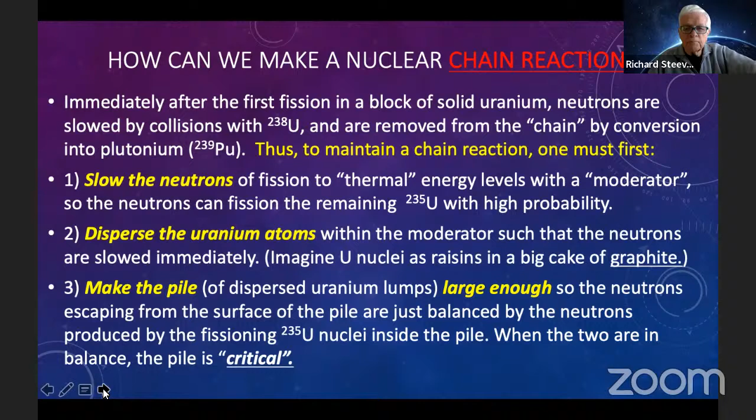And so you need to have it slightly above, by 3 or 4%, the neutrons being generated inside the pile as opposed to those that are leaving outside. So this is perhaps going to explain it a little bit better.

If we make the pile larger than ideal for criticality, then the reactor is said to be supercritical. Again, that does not mean it's going to blow up. It just means it's going to continue, and run away should not be thought of as blowing up either. It means it'll continue to build up to a stable heating temperature. If the pile is smaller, it'll be subcritical and the chain reaction will dwindle and die.

And after World War II, when people went in to see how far Germany had come along in building a reactor, they found that they had some good ideas, but they did not have a pile large enough to make it work. And so it would have taken them probably another year or two, but we were worried that they would beat us to the draw.

I had no idea, in reading about this as a kid and a teenager, that they were so worried about the Nazis in Germany competing with us. And that's what drove these people at Oak Ridge to work so diligently.

So that's the multiplication constant, K, and it's 1 for a perfect chain reaction. But to have it working practically, it should be a little larger than 1, by 3 or 4%.

And this is the image of an incoming neutron hitting a nuclear fuel nucleus, in this case, most of the time, uranium-235, and that's splitting up into some fission fragments. They're never exactly the same. They're practically always slightly different in size, and 2 or 3 neutrons are released. On the average, it's 2.5. So they have 3 shown there.

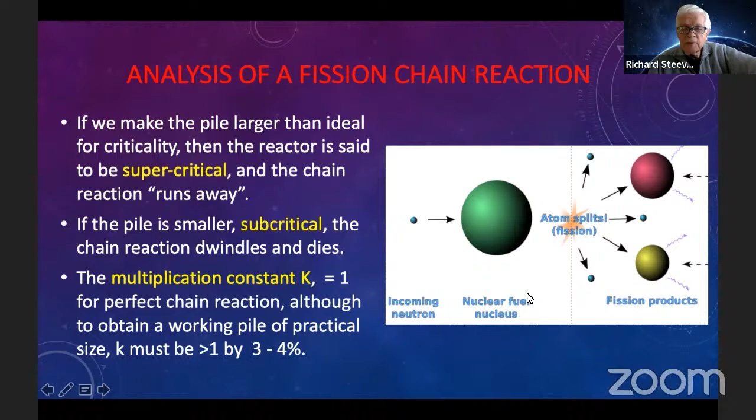There's a bit of going from the theory back to the history. I didn't realize this either, that Fermi was only able to obtain a K value of 0.87 back in October. He'd been working on it for a while, and he realized that he had to get it above that, and he was working in this squash court that you can see over on the right. He improved his pile by making 31 experiments over a 1.5 year or so time.

After much refinement of the lattice in the pile, that is, setting the raisins at the right distance in the cake of graphite, he also had to remove traces of boron that were in the graphite that inhibited a lot the reaction. You can see at the very bottom there a guy standing in a lab coat pulling a rod out, and that's a rod of boron, and that inhibits the reaction. And by pulling that out, he can pull out some of the absorbed neutron inhibitors, allowing things to move ahead a little bit. And that was done on December the 2nd, 1942.

So this book was written in 1992, the 50th anniversary of that discovery. Weinberg, unfortunately, was not present. He rather regretted that. He was just a graduate student, so he ranked 54th, and they only had room for the top 50. And so he was regretfully not there to witness that.

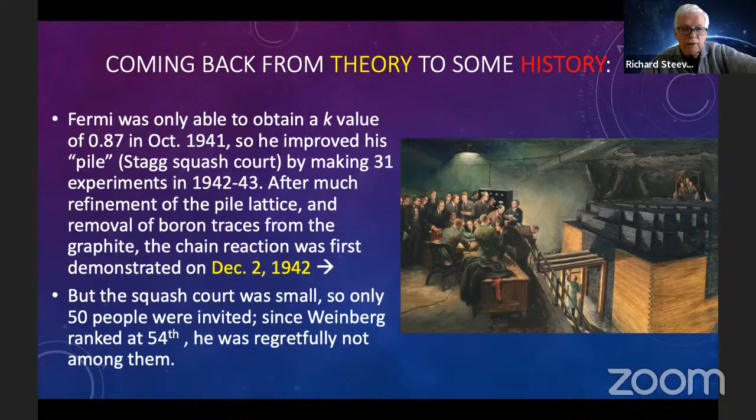Yes, thank you. That's a good point. I didn't bring that in, but that does bring in a lot of history of heavy water from Norway slowing them down. Thank you for that. And Canada is still pursuing that very successfully. Yes, and so is Copenhagen Atomics, although they're still in the early stages. But yeah, Canada has used heavy water for years, and they do talk about it a little bit more coming up here.

Notice that these designs were begun in April 1942, 8 months before Fermi got K up to 1. The designs were begun already for making plutonium-generating reactors, and the cooling material was discussed at length, and Wigner, Weinberg's boss, finally chose natural water. Natural, of course, means not heavy water, but just the water that comes out of our taps. That is, it just has a proton in the nucleus and an electron spinning, whereas heavy water has a neutron along with a proton in the nucleus, and that's called deuterium.

So plans were submitted in January 1943, and a 500 megawatt reactor was built in Hanford, Washington by DuPont to produce 500 grams per day. So that was the history over that period of time when they were starting to make plutonium bombs.

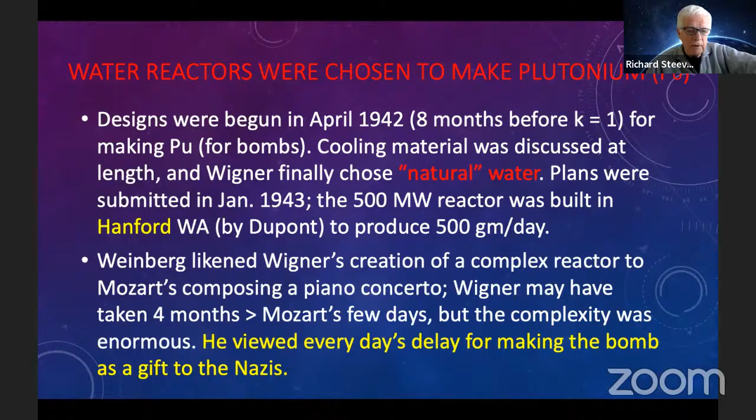Weinberg really is impressed by his boss, Wigner, and he likened his creation of this complex reactor, because there are about 1,000 different permutations and combinations that one could choose. Wigner had to think of them all with the intelligence of a brilliant physicist and come up with one that was practical, wouldn't get people into problems, and could be used industrially for making more and more of these bombs. He compared it to Mozart composing a piano concerto. Wigner, he said, may have taken 4 months to Mozart's few days, but the complexity was enormous. And he viewed every day's delay for making the bomb as a gift to the Nazis. So this puts attention into it that I wasn't aware of until reading more into this story.

Here's a picture of Enrico Fermi off to the right. So in April of 1944, he and Leo Szilard outlined ideas for fast reactors. And the next day, Szilard came up with the name breeders. And this was something that produced more plutonium than they consumed. We'll get back to this in a little while. I think the whole idea here is fascinating.

Back then, they believed that breeders were essential for future energy because at that point, we were getting our uranium from the Belgian Congo. We didn't realize that it was not that hard to find in Canada or in parts of the United States or elsewhere. And we thought we had to get it only from there. And so we felt we'd need to breed more and more of the uranium.

I'm going to give you a little shortcut. This is not in the book, but it helps to understand the word breeding. I found it was a difficult concept to appreciate unless one first of all thought of the conversion ratio. The conversion ratio is the ratio of new fissile atoms produced to the fissile atoms consumed.

So something that is fissile then is something that spontaneously fissions, whereas below it, you see here the word fertile. Those are other transuranics like uranium-238 that can be made fissile by having it hit by a neutron. But in the case of 238, it just becomes plutonium, and so you lose it from the typical uranium chain reaction that you've thought of in your calculations.

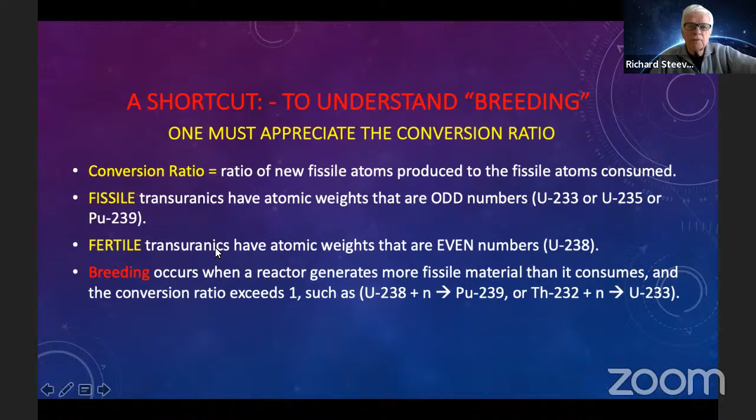Anyway, they did their experiments with non-enriched uranium initially. It was light water. And they found that they couldn't get K to quite get up to 1, even with the best lattice configuration they could come up with. So Weinberg reasoned that they could make more plutonium for bombs by using low enriched uranium, or LEU, moderated and cooled with pressurized light water. So they avoided the cost and expense of heavy water,

but they did have to do some enrichment from the regular uranium that's mined. These two improvements became the standard for building future light water reactors, and that's important to recognize, that this became the standard, which was not only used for making plutonium for bombs, but later used for making heat and especially electricity.

Need to just review a couple of facts about uranium as a fuel. Natural uranium is 0.7% 235. All the rest of it that you mine out of the ground is 99% 238. So it's a huge, huge difference. And that's because over the years, this has been decaying and fissioning spontaneously in a few places in Africa where the temperature was just right back in geologic times. And so there was actually some natural fission going on, and that's why we have less of this than we had millions of years ago, and eventually it's all going to be gone.

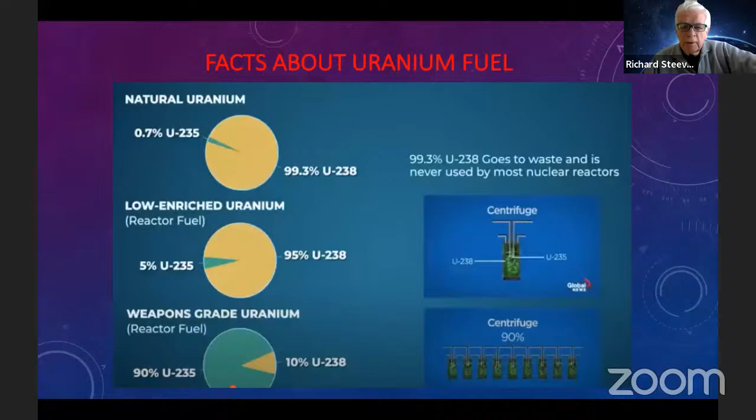So that's for weapons grade. So this is important to recognize that there are a number of different ways to enrich the amount of uranium 235. You can use a centrifuge. There are other methods as well that were developed during and immediately after the war that are used, but they're more complicated.

One point. Yeah. The higher enrichment allows you to make the mass of uranium more compact and still go critical. So yeah, that gives us the modular reactor capability. That's right. Yeah. Thank you.

I thought that most of us don't know about Farrington Daniels. He was a professor of chemistry right here at the University of Wisconsin. He was an imaginative guy. He developed a way to fix nitrogen as a first step in making explosives. His device consisted of a heap of hot pebbles of magnesium oxide. It was contained in a large pressure shell. Nitrogen in the air that flowed through the pile became fixed to the pebbles as magnesium nitride.

He joined the Chicago group to see if, instead of using pebbles of magnesium oxide, he used hot uranium. And he would cool that with helium gas percolating up through them, and that would make a simple, safe device. He met many skeptics at Chicago, partly because he needed to have the uranium highly enriched in the first place. But his pebble bed idea is still being developed today and used in some countries. It's an interesting little sidelight.

They also had a code name for a pile that was moderated by heavy water. And they call that the P9 episode because of the code name for that particular pile. In 1942, Wigner and Weinberg realized that K, obtained with heavy water as a moderator, really improved the value of K, the multiplication factor, by around 10%, which is pretty considerable. And so they started using that in various places, particularly out in Hanford.

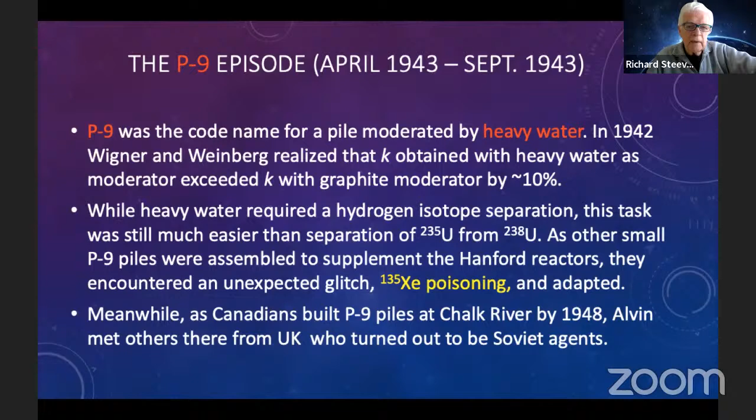This is just sort of an interesting photograph of the Clinton labs. It's part of Compton's metallurgical lab. It's a sibling of his other branch at Argonne lab, run by DuPont and the Corps of Engineers. So the atmosphere here is very different from that of a university like the University of Chicago, very militaristic. This building that you see here was called the X-10 Research Reactor, in-house in the Clinton labs.

It was built in 9 months. So they were clearly driven by their fear of the Nazis. It went critical on November the 4th, 1943, and later developed 1 megawatt. 6 other very different research reactors were built there over the next few decades. So things were really hopping there.

And when you consider that people went off to work there with or without their families, and that was just an isolated part of the hills of Tennessee for years, and nobody knew where they were or what they were doing. It was a very secretive operation.

Along the way comes Leo Szilard. He's a brilliant theorist, and he proposed 2 things. First, he said that all papers on fission should be withheld from publication. Well, that immediately told the world, especially Russia, as well as Germany, that we must be up to something. And so that, in a way, was natural for him to want to do, but it gave a signal around the world right away.

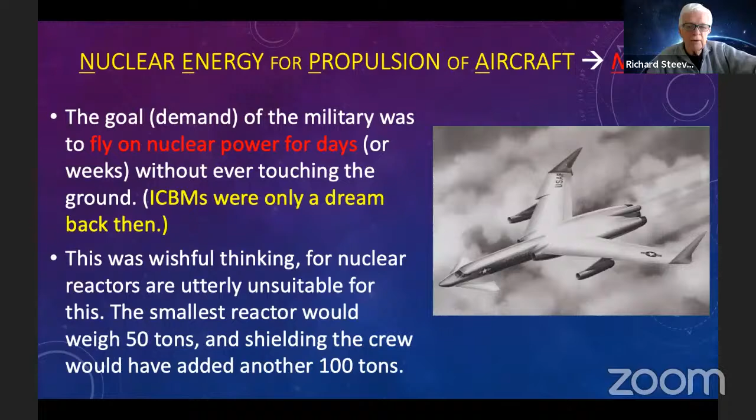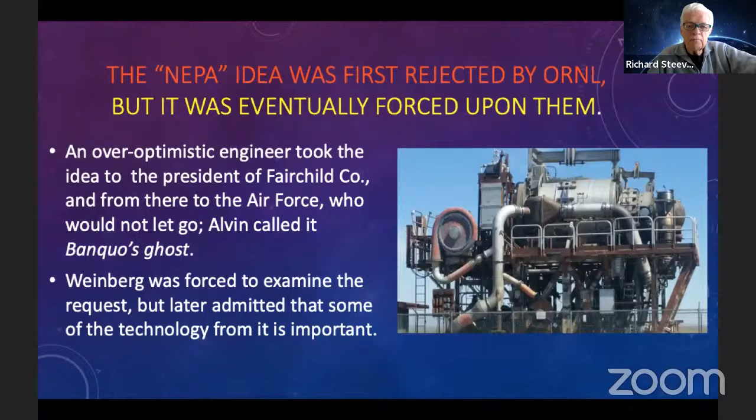Alvin called it Banquo's ghost, after Macbeth. He was forced to examine the request, but later admitted that some of the technology from it is important. Well, again, that's understating it, because he got the whole idea of molten salt reactors from being forced by the military to look into the possibility of NEPA.

And that leads us into this whole idea of taking the fuel out of its solid state and dissolving it. You can dissolve uranium in water, and so you could have a homogeneous mixture of uranium in water. And he said there are 4 advantages to this. You eliminate the solid fuel, reducing complexity and complications of loading up all these thin tubes with metallic uranium. Also, he pointed out that the gaseous fission product, this xenon poisoning, can be removed much more easily if it's dissolved, because it comes off as a gas, and you can just harvest it and purify it and either sell it if it has a value, or just get rid of it.

But solid fission products also can be removed continuously without shutting down your reactor. And the control rods are not needed at all, because when it's in liquid form, things move apart as they get hotter. You have an automatic built-in reduction in intensity of fission. So it gets rid of that whole control rod complexity, which is nice. But he said they also had 2 strong disadvantages.

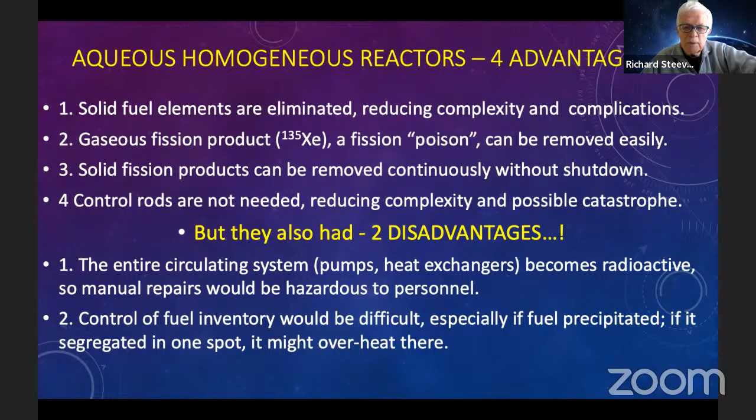The entire circulating system, the pumps, heat exchangers, become radioactive, so manual repairs would be hazardous to personnel. Well, today that's not so much of a problem, because we'd have robots to do all that, and they're actually planning that in Copenhagen. Control of fuel inventory would be difficult, especially if fuel precipitated, if it's segregated in one spot. Well, that is a problem they had with these ceramic coated balls of uranium in the pebble bed reactors, but there's no good evidence that it would precipitate in one spot at high temperatures, but maybe there was a theoretical probability.

Anyway, they went from aqueous to other systems, but not water. And that is basically the use of fluoride salts. There are various fluorides, but lithium fluoride was often chosen. The thermodynamic stability of fluoride salts, both for uranium and thorium, allowed them to be inherently compatible with stainless steel pipes without using metal oxides for pipe protection.

If you look at stories by journalists, they say there's a huge problem with corrosion. These journalists haven't bothered to read the literature well enough. Those problems were dealt with decades ago, and they just keep repeating the same misconception that corrosion prevents the use of molten salts, and it's totally wrong. These salts boil at such high temperatures, by the way, 1700 degrees, that they can operate at normal pressures. This is a huge advantage over water, which needs to be pressurized 67-fold over atmospheric pressure. Thorium, as well as uranium, dissolves in molten fluorides and enhances versatility. We'll talk about that a little bit more later.

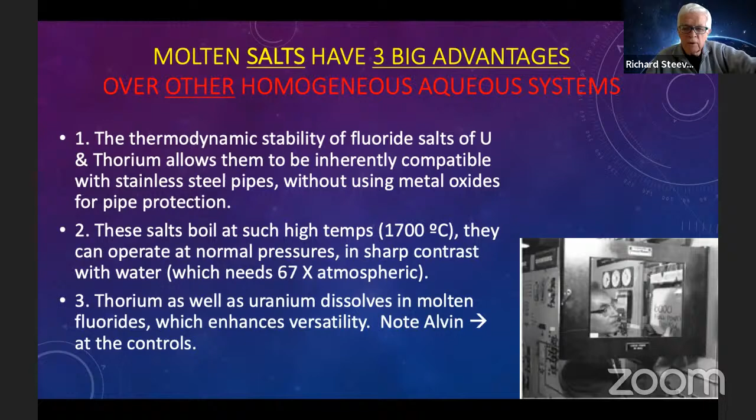Here's a picture of Alvin at the controls of their molten salt experiment. It's a molten salt reactor; some of it is on paper, but some of it actually did work. The idea here is that you can reprocess continuously from the spent fuel and also pull off the xenon. So it's very useful in that sense. This is more like a conventional reactor, but there are no control rods, no uranium encased in rods. It's all uranium mixed in the fluoride salt.

What's quite interesting is you can have a freeze valve here. And so if power doesn't come to the reactor and it shuts down all the pumps and so on, then this valve, in the absence of an electric cooler, will melt. And all of this will fall into a holding tank. So you would totally avoid the problems that they had in Fukushima.

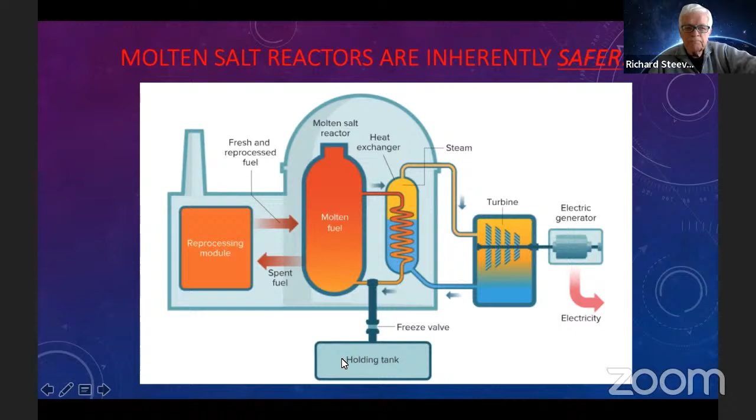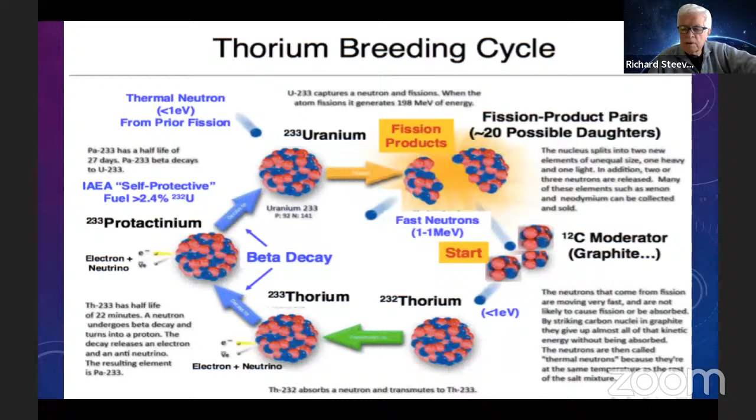I've shown this slide before, and I don't plan to go into it in any detail here, except to point out that thorium here, with just a fairly weak neutron of 1 electron volt, can be induced to change within 22 minutes half-life to thorium-233, then protactinium, then uranium-233, and from there into fission. It is a natural breeding cycle which lends itself well to using in a reactor, and also gives less waste, so it contributes well to the breeding concept.

announced its successful testing. When subsequent comparisons of thorium and uranium and their breeding power didn't pan out, and I'm given no details on this, but for some reason or other, thorium didn't compare well with uranium in a particular experiment, and so our government stopped funding in 1973. It's too bad, because they chose a Clinch River reactor, and that money was poorly used, and so neither the Clinch reactor nor the breeder reactor were continued.

So Alvin became obsessed with the idea that our whole future depended on the breeder. He didn't know about climate change back then, didn't anticipate the high costs. He didn't anticipate the public fear of waste, as it was called. And he published extensively in 1958 and 59, traveled around the world giving optimistic lectures, but nobody listened, it seems, in any power. And a number of people at AEC did not appreciate his emphasis on the safety of molten salt reactors, and I think that was a serious and main reason why the nuclear era has been on the decline for the last 20 years or so.

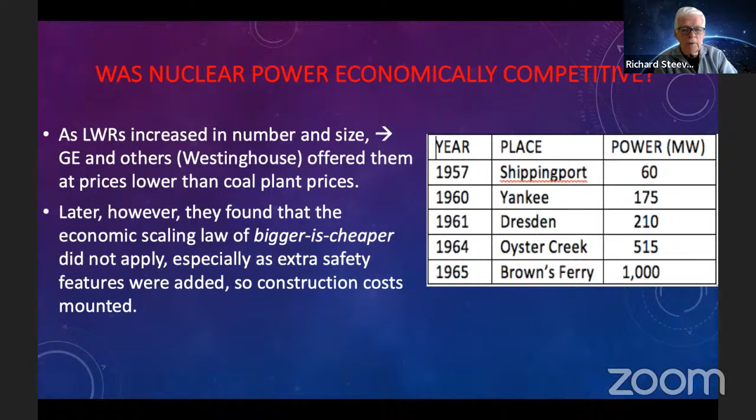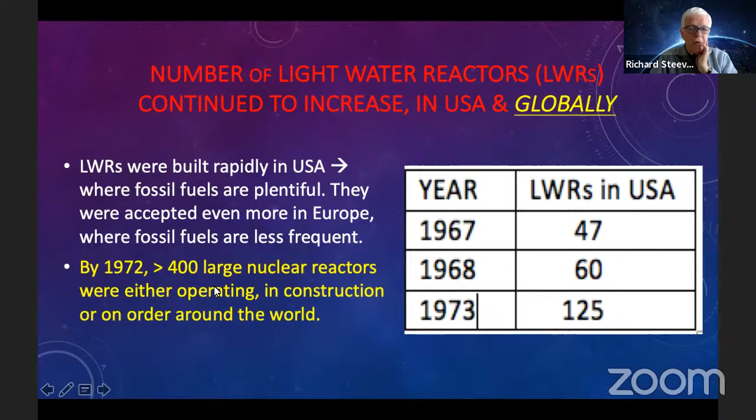But later they found that even though using economic scaling of bigger is cheaper, it didn't always apply when they added these extra safety features. And so the construction costs mounted. And I'm going to show a few more slides here. What's shown here are light water reactors in the United States, but globally, during the same time, it went from 125 in the States to 400 large nuclear reactors either operating or in construction or on order around the world. So things really did take off.

And if you look at 1973, when thorium work in the molten salt reactor was discontinued, nuclear was providing just 1% of our global, notice, not United States, global energy. Obviously, fossil fuels dominated the picture. And interestingly, decades later, in 2019, it was just about the same, except a little bit of wind and solar here under others, unfortunately way too much biofuel, hydro about the same, because most of the hydro that we've been using was built before 73, and that applies to the rest of the world except for China, perhaps, where they put in a large hydro unit in that period.

But nuclear in this slide is emphasized because China, Russia, many other countries, France in particular, Sweden, were all putting in nuclear reactors. In France, as some of you know, 78% of their grid is from nuclear reactors, and they breed it or recycle it not only for themselves, but for other countries. And they manage perfectly well. Their electric trains are therefore running on 78% nuclear at high efficient speeds across the country. So they've really benefited. And interestingly, Germany, which is right next door, is just the opposite. They're shutting down all of their nuclear reactors and building more coal plants in spite of some public resistance to this. So it's interesting that two countries side by side are so diametrically opposed in their philosophy.

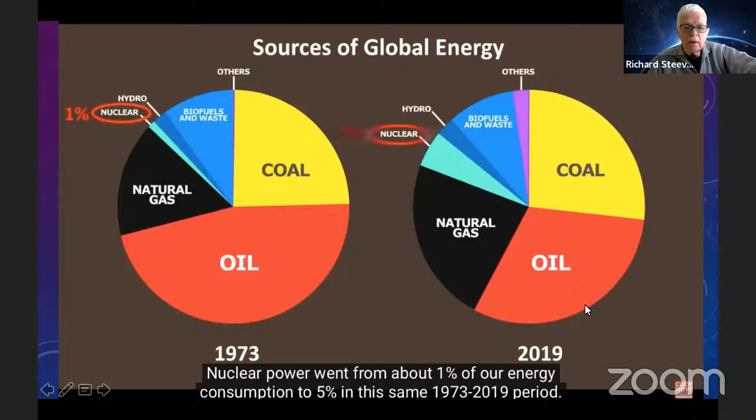Alvin hypothesizes that the French, because of their background with Curie and many others in the radioactivity scene, feel that they're a part of discovering the whole idea of not only radioactivity, but of fission. And so they accept it much more readily than Germany, where it was not managed successfully, and it was done in competition with the Western world.

That's when I worked there. Indeed, that must have been it, Steve.

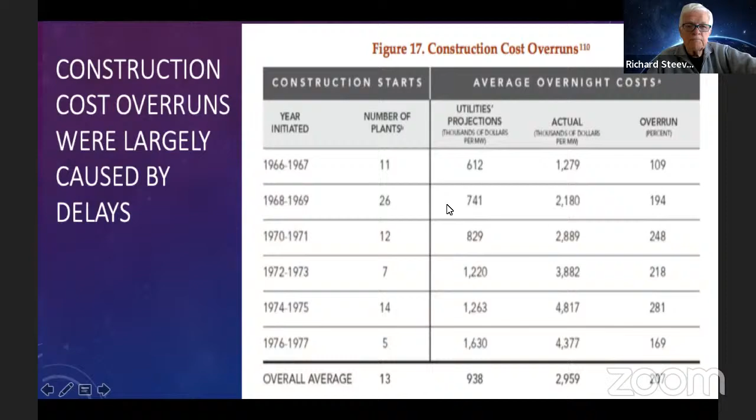This was before Chernobyl and even before Three Mile Island. But in spite of that, they kept thinking of ways to make it safer and safer and adding to the cost, and thought it was a golden goose, which they destroyed largely by having these cost overruns. Faster refueling, they did accomplish. There were some real positives.

If you look back in the 1990s, it would take over 3 months that they would have to shut down one of the reactors. That's why they would often have at least 2 at a given site, so that they could shut one down and have the other one continue to run while they refueled them. Canada didn't have to do this because their reactors were on their side, and they could simply push in fresh fuel from one end, and it would just push the spent fuel out the other end of the reactor. But we have vertical reactors, and the whole thing had to be shut down.

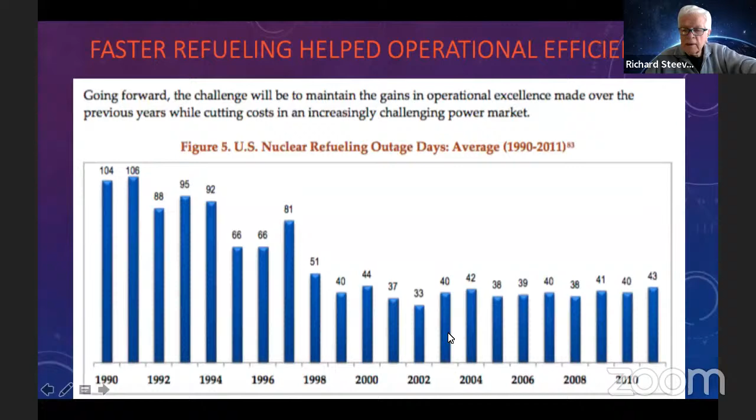But you can see that we accomplished over 10 years, cut it way back from 3 months to a little over 1 month. And that's been stable since. And they also do some other tidying up, which is important to do when it's down. So in that month, they accomplish a great deal.

Just a little aside from the point of view of medical isotopes, this month, Nuclear News pointed out that Oak Ridge has been a supplier of medical isotopes since World War II. They're now making actinium-227 for bone metastasized prostate cancer and actinium-225 for targeted alpha therapy. Alpha rays, as you may recall, can't penetrate a piece of paper, but if you inject them and they have ways to either immunologically or otherwise attach to cancer cells specifically, then the alpha particles, which are helium nuclei, can do a lot of damage to the cancer cell. So that's being pursued aggressively too.

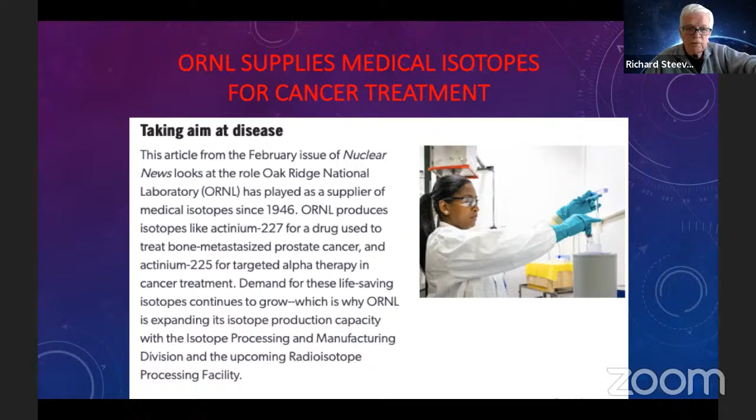A little aside here, the nuclear ship Savannah, I thought that was such a charming ship. And we don't really hear very much about it. The idea was if light water reactors could power submarines, why not a civilian surface ship? Eisenhower endorsed this, and the Savannah was launched way back in 1959. Babcock and Wilcox built the reactor, and Oak Ridge was a technical consultant.

It was a white beauty, but too costly. They used it for some freight and some passengers, and Australia and New Zealand wouldn't even allow it in their waters. But Japan and Germany also had similar sorts of ships, the Otto Hahn and the Mutsu, and they also stopped running. They just didn't make any profit.

Along the way, Fermi, way back in 1944, made a warning that not too many people took seriously. He said nuclear reactors create radioactivity on an enormous scale, and if a reactor failed catastrophically, radioactivity would be widely spread. And this, of course, happened in 1986.

But most people who know anything about Chernobyl realize that it was one of a kind. The reactors in Russia are graphite moderated, not nearly as safe as light water reactors, inherently safer because as things warm up, there is a natural negativity that controls light water reactors from getting hotter. But with the reactor in Chernobyl, it just was done at low power.

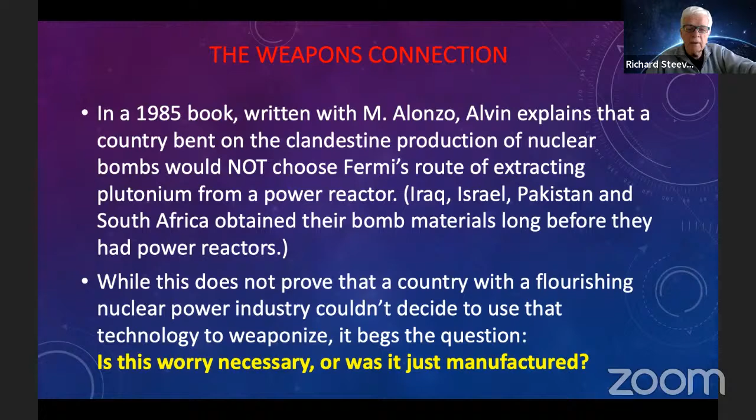And while this doesn't prove that a country with a flourishing nuclear power industry couldn't then decide to weaponize, it begs the question, is this worry really necessary, or was it just manufactured? And I'm inclined to believe the latter, as does Weinberg.

But the public seems to be really hung up. Even our famous Senator Bernie Sanders, when running for president at a university and asked by intelligent students what he thought about nuclear energy, all he could say was, well, they make a hell of a lot of waste. And that shows how much some of our politicians have learned about nuclear energy.

So we have this problem of spent fuel, which some people call waste. They pose a much smaller hazard than reactors do. They're solidified, they've cooled outside for decades in these casks. They produce relatively little energy. If water reached these packages, radioactivity could be leached, perhaps, and dispersed to a large population. It's a pretty big if, but it would be very slow. And if a transport accident occurred, large doses of radiation would only reach a very small population. But the risk of large doses of radiation to large numbers of people is just precluded by thermodynamics.

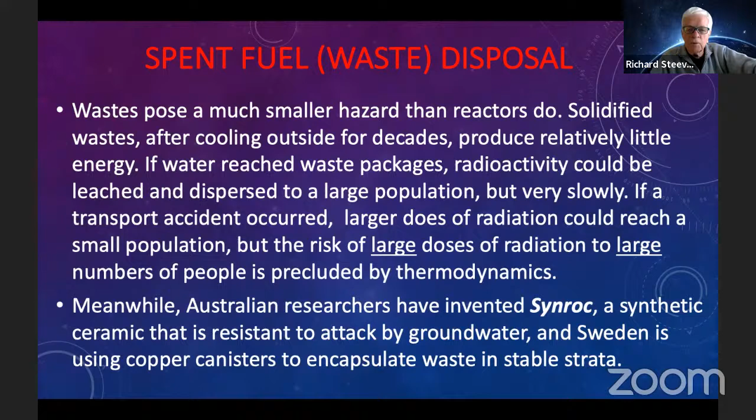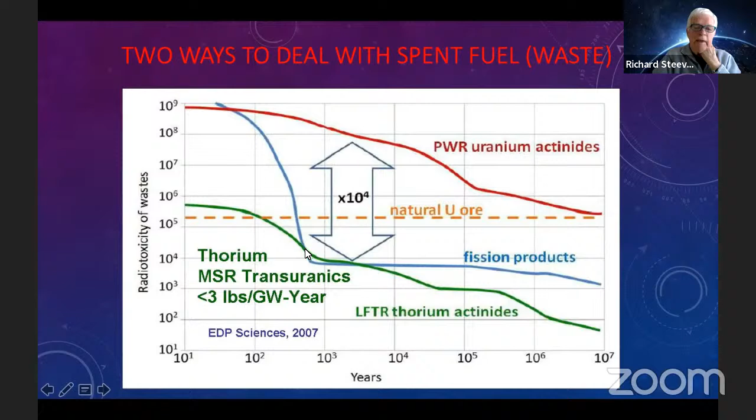And then if you take thorium, which starts off at a much lower radiotoxicity, even in a little over 100 years, it's back to natural uranium levels. And so either way, either by switching to thorium or by using sodium coolant, you could allow all the nuclides to decay with only fission products, and greatly deal with that problem.

Could we have done better? Alvin suggests that there were four ideas for the future. He said you could put all reactors on relatively few sites. He said we have 100 in the USA. Well, of course, now we're down to about 94. But he said we have 80 acceptable sites.

And putting at least two reactors on each one, we wouldn't need that many more. He said we could increase security at these sites, of course, to avoid diversion. Well, after 9/11, we learned two things. One was that nuclear reactors are hard to hit from a passenger airliner, and two, you can do a lot more terrorism by hitting the places in Washington or New York City than a reactor, and you'd have a lot of reactors to hit.

Professionalize all nuclear operators. That's a wise one, similar to airline pilots. I think I'll let Stephen comment on that if he thinks that's done enough already. Reorganize the utility industry by separating nuclear generation of electricity from its distribution, and that we're struggling with still. He said the former, that generation, should be in the hands of a single powerful entity. We're still struggling over our grid, recognizing its huge importance and vulnerability.

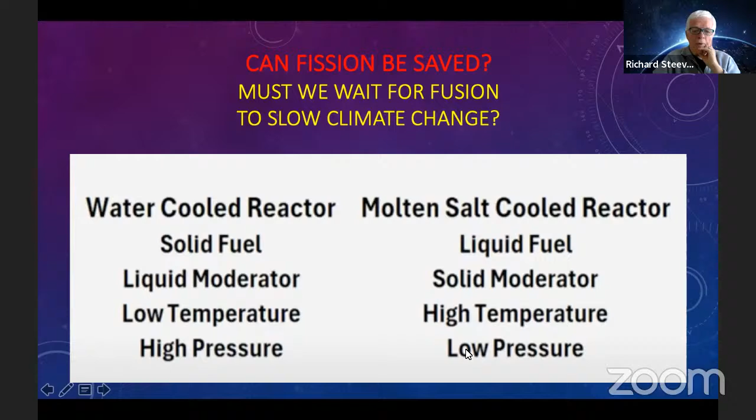But what I'd like to emphasize is the huge differences in these four qualifiers. In the water-cooled reactor, there's solid fuel, here liquid fuel. Here we have a liquid moderator, light water. Here we have a solid moderator. Part of it is the salt, and part of it is the graphite or beryllium. But most of the solid would be graphite. Low temperature here, a high temperature here, and low pressure. So just the opposite in so many ways.

So the key strengths pertaining to thorium, he outlined them. The capacity for more complete fission or higher burnup and less waste, the higher melting temperatures and improved thermal characteristics, the less production of plutonium and minor actinides, the capacity to reach higher conversion or breeding ratios in both thermal and epithermal, meaning halfway between thermal and fission spectra of neutron energies, just a bit higher. So epithermal, like you would expect, means a bit higher in temperature.

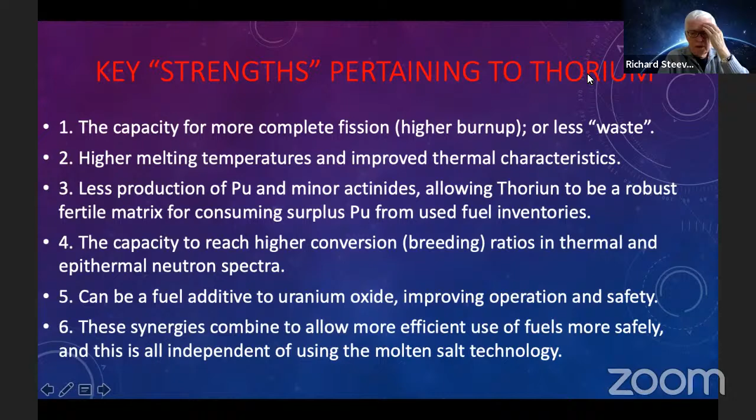It could be a fuel additive to uranium oxide. And of course, you're going to need uranium oxide to get it going, since it's only fertile. It needs to be made fissile with something like uranium. It improved operation and safety, and that was shown at the first reactor in Shippingport. The third time it got fueled, they put in some thorium and they had more fissile material at the end of a few years. These synergies combine to allow more efficient use of fuels more safely, and this is independent of using the molten salt technology. I've been criticized for conflating thorium with molten salt reactors. They don't have to be, but they do work well together.

So Alvin's lasting words were, during my life, I've witnessed extraordinary feats of human ingenuity. I believe that this struggling ingenuity will be equal to the task of creating the second nuclear era. My only regret is that I won't be here to witness its success. And that was said two years after his book was written. I would empathize with that concern.

Alvin's wife died of lung cancer. She was a heavy smoker, and he married after a few years Genevieve, and they lived a very happy time together, and both of them encouraged widows and widowers to consider a second marriage. They were both very happy in their second marriage.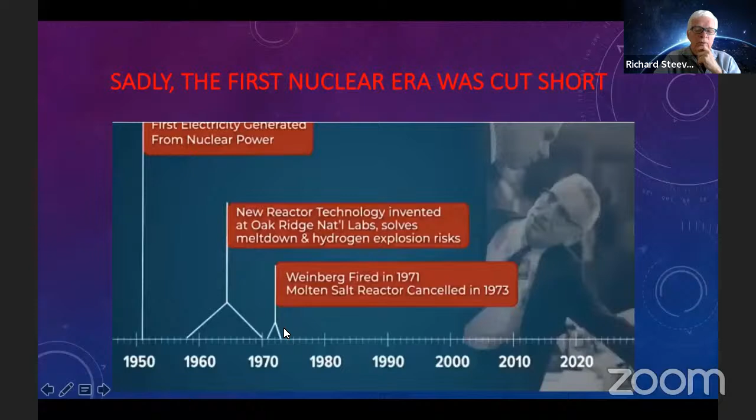That's not quite right. The experimental breeder reactor that I visited in Idaho, I think, had the first electricity in maybe around 1950. Second thought. Anyway, newer reactor technology was invented at Oak Ridge and solved many explosion risks. Weinberg was fired. That should be 1973, and that's when the molten salt reactor was canceled. But we've had a long dry period here, and we need, for the sake of climate change, to take care of our elderly here as well as our babies.

So that's my review of the book, and let me open up to questions as I get rid of these slides so I can see who's talking. Oh, we've got a good turnout here.

Richard, I had a question. I don't understand. Okay, the subcritical. Subcritical. I can hear you, Lee. Oh, you can't hear me? Yeah, I can hear you fine. I can see you now.

Yeah, subcritical just means that you're not getting enough through breeding. You're not developing enough plutonium. Plutonium is one of the main products of fission in a uranium reactor. And when you get plutonium, that allows some more fission going on. And if you have thorium in there, so much the better.

But if it gets to be subcritical, it means that you're not generating as much fissionable material as you started with, and so your reactor will die. Die only means it'll stop reacting. You'll have a reactor that will cease, and you'll have to go through all the startup procedures again. Okay, so in conjunction with that, how does the graphite pile interact chemically/mechanically with the fissile products?